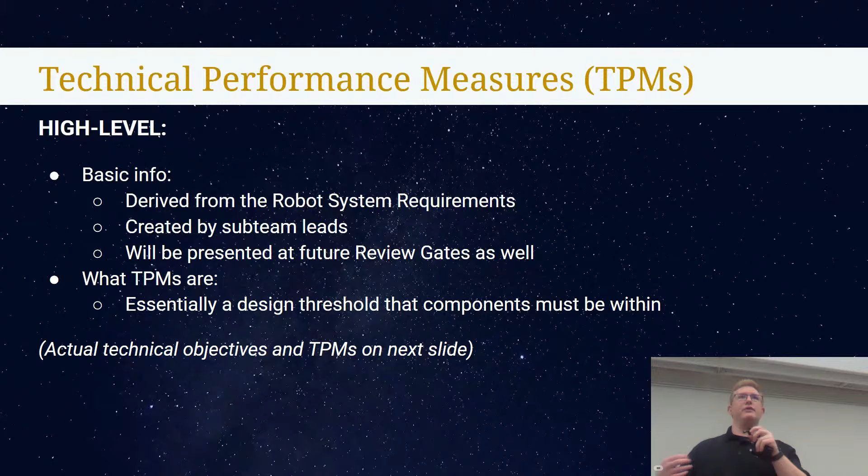I'm also going to be talking about our technical performance measures, or TPMs. Basically, TPMs are derived from our robot system requirements, and they're created by the sub-team leads. They will also be presented at all of our future review gates as well. In terms of what TPMs actually are, they're essentially a design threshold that components must be within.

These are some of our specified technical performance objectives, things that are outlined within the guidebook and then our stakeholder requirements. For example, the robot shall be contained within a payload envelope measuring 1.5 meters in length times 0.75 meters width and 0.75 meters height, and that is mandatory.

The robot shall also not exceed 1.5 meters in additional height, or 2.25 meters above the surface of the regolith, which is also mandatory. Then the robot shall not weigh more than 80 kilograms. This includes any beacons or external parts that we're using for navigation.

And additionally, a specific rule that we may be using this year is multiple robot systems are allowed. However, starting dimensions of the robot shall comply with the maximum volumetric dimensions and mass provided, as well as any other requirement that we have to follow for a normal robot.

Overall technical objectives that we're going for: the robot should minimize weight, minimize part count, have fasteners in easily accessible locations, and contain parts that are easily removable, disassemblable, or replaceable. The robot should contain components with low lead times, just trying to make the assembly as quick as possible. It should also minimize power consumption, incorporate dust-resistant features, be able to complete the mission autonomously, and use encrypted communications. These are all just competitive goals that we have.

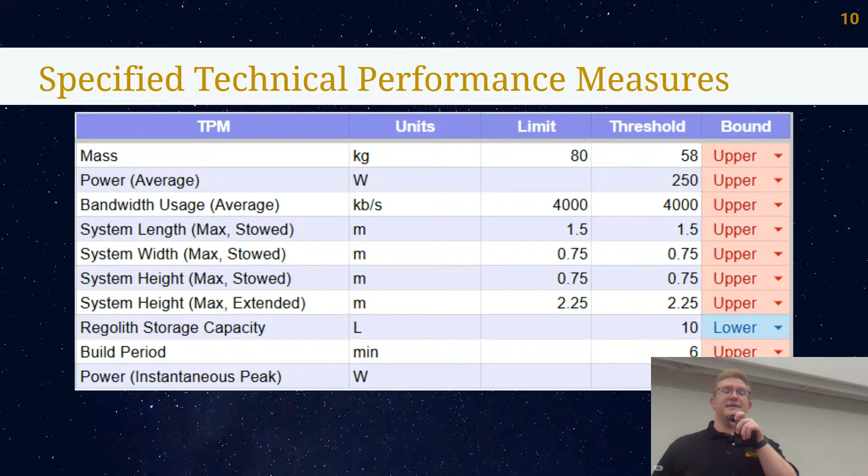In terms of our actual specified technical performance measures, our upper limit for mass is 80 kilograms, with our threshold being 58 kilograms right now. Our average power is going to be measured in watts with an upper threshold of 250. Our upper limit for bandwidth usage is 4,000.

The system length max stowed is going to be 1.5 meters as an upper bound. Width and height are both going to be 0.75 meters. System height max extended is going to be 2.25 meters.

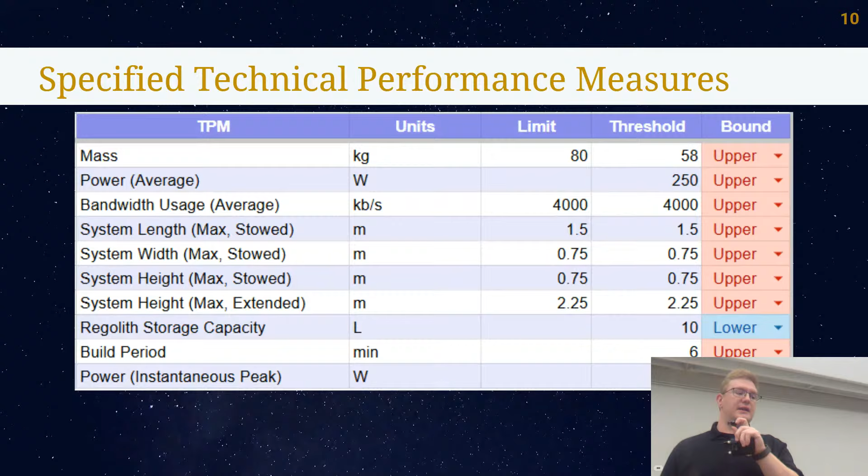Regolith storage capacity, our aim as a lower bound minimum should be 10 liters. Our build period should be around 6 minutes. And then our instantaneous peak for power should be about 750 watts.

And now I want to invite our FabOps lead to present the two robot proposal.

Excellent, thank you, Andrew. My name is Alex Repikov, and I am this year's FabOps lead. I'm here to present a proposal for two different robots. A lot of the sub-teams already know about this, and the relevant ones, I believe, will be talking more about it in their specific sections. But I'm here to give a general overview of what the idea is and why we might or might not want to do it.

General overview is that we have two robots. The first one will be the main robot, and this robot will go and mine regolith into its own deposition system, similar to ways we have done previously. We go and mine, we go and store it. What is different is that this robot will always be mining. It will never go and drive over to the deposition zone. It will just collect its regolith and hold on to it until the mini robot can come.

And the mini robot's only job is to go and shuttle regolith between the main robot and the deposition area, as fast and efficiently as possible. So to summarize, the main robot will always be mining, and the mini robot will always be moving, which means we'll be able to get more points because the main robot never has to stop mining to go and actually deposit.

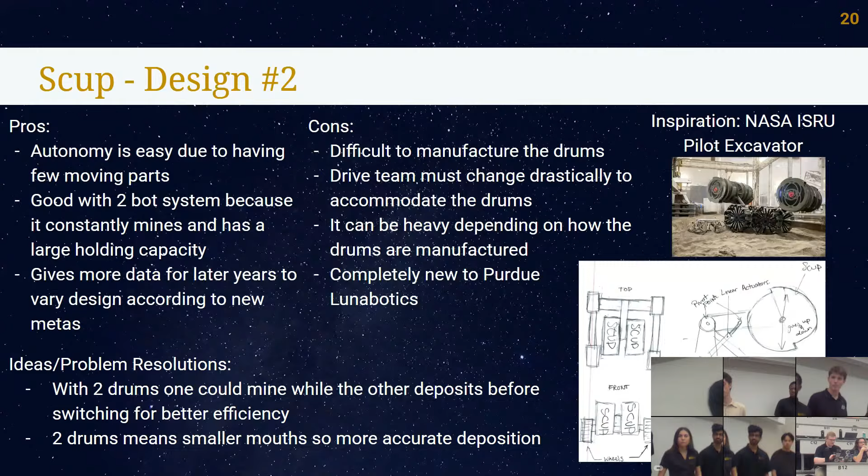Hello everyone, my name is Ashita. My group was in charge of coming up with the design for a bulldozer. In past years, our bulldozer idea has kind of been like a U-channel pushing dirt into the deposition zone. But as Alex explained, the layout of the competition field is not conducive to that this year. We have to travel a little bit more between excavation and deposition.

So our idea has transitioned from a bulldozer to more of an excavation scoop. We've noticed in past years that bulldozers aren't always the most efficient design because while they're able to scoop up the dirt, they don't always deposit it all the way. So our design has considered that weakness from past years, and Hayden will explain more about the excavation scoop design.

The way our design works is it uses two high-powered linear actuators to raise and tilt the bucket. The first linear actuator is attached from the base of the robot to the arm of the excavator, raising and lowering the bucket to give us the proper ground clearance to operate. The second linear actuator goes from the arm to the bucket, allowing the bucket to tilt to both scoop and deposit regolith.

The reason we chose this above a standard bulldozer design is because a bulldozer has to push horizontally into the regolith, which, with the poor traction of regolith, means most robots cannot get a significant amount of material in their scooper. We decided to scoop vertically into the ground, using the weight of our robot to get a tremendous amount of regolith, then safely carry that to the deposition zone without loss of material. And now Ella will further elaborate on the benefits of our design.

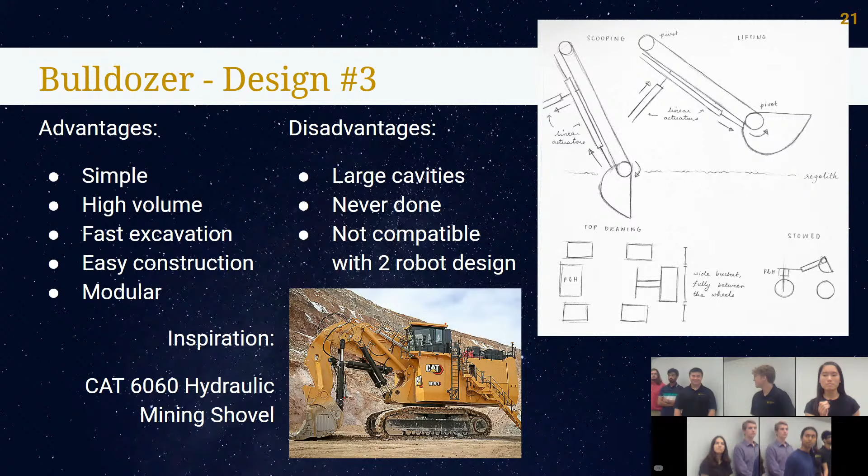Hello, my name is Peter. Our 4th design is the dumpster, made by University of Illinois Chicago in last year's competition.

Hi, my name is Anurag, and the way this system would work is by taking a bucket and essentially shoving it into the ground and driving forward to get as much regolith as possible into that bucket, then driving to the deposition zone, where it would vibrate to shake out the regolith and increase the volume by simply fluffing it up.

Hi, I'm Austin. The advantages of the system are that it would mine very quickly because it can hold so much volume. We saw this last year in terms of how much volume it was able to move. And because of the design, it also removes a lot of heavy components, so the mass will decrease.

Unfortunately, this design has many disadvantages as well, which we decided outweigh many of these advantages. Firstly, we believe it has very low compatibility with the 2-robot system because it has to stop mining and transfer the regolith into the second robot. We also have no experience with this design, never attempted something like this, and we have very little examples to look at from the past. We also believe it would struggle to be fully autonomous because of the complexity in completing one cycle of mining operation, and there's a high risk of getting stuck because it digs pretty deep holes.

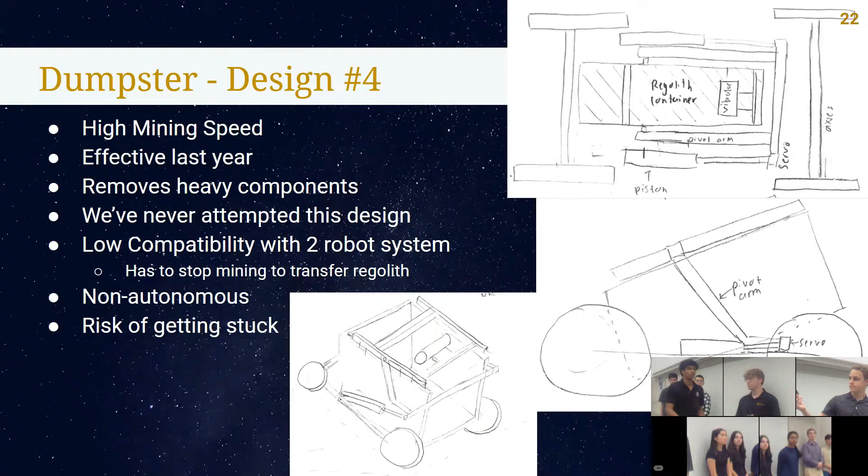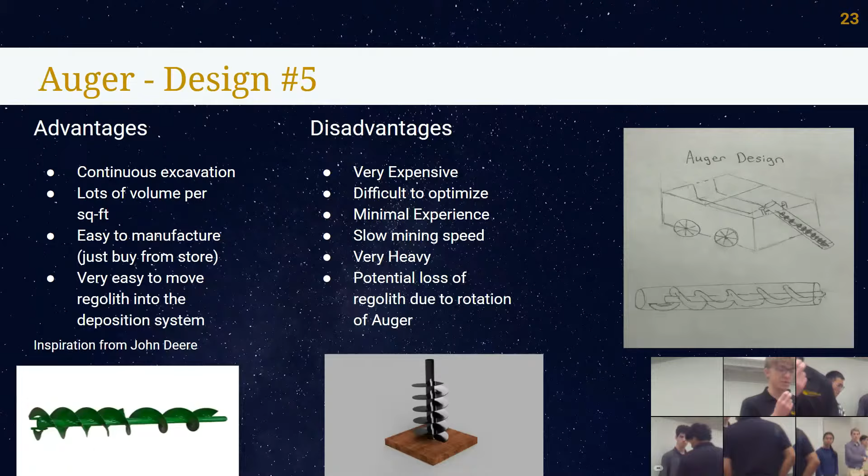Why is SCUP's mining speed rated so lowly given the performance of UVA at competition last year? SCUP has a low rated mining speed, more in comparison to a bulldozer and dumpster who still mine significantly more at competition.

I believe that SCUP, when optimized, has similar mining speed to a bucket elevator optimized. However, I do believe in a field situation like last year, those two designs would still fall short in pure volume compared to a bulldozer and dumpster, and that's where I weighted the mining speed.

I do agree that SCUP is worse than a bulldozer and a dumpster, but bucket elevator could outperform SCUP by a significant amount, despite two pretty good bucket elevator teams, Alabama and Michigan Tech, mining significantly less material than UVA's SCUP last year. So I'm wondering where the justification is for bucket elevator's somewhat high mining speed, comparable to dumpster, who mined almost 100,000 cubic centimeters more than both of those bucket elevators in the first round of KSC.

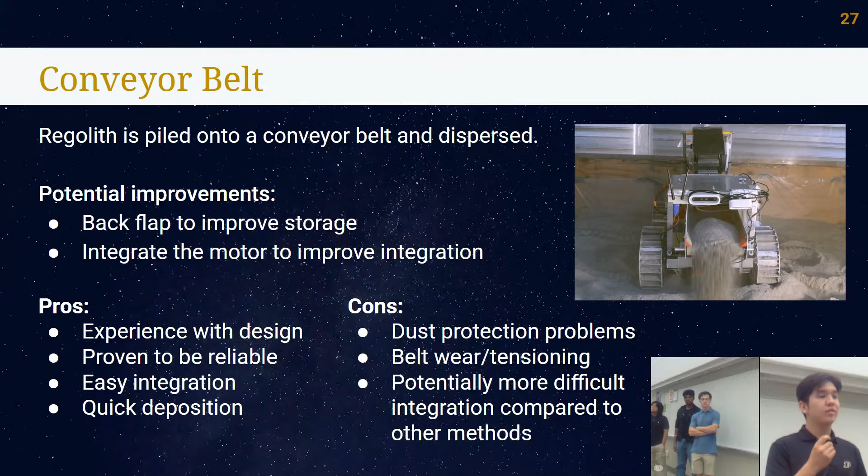Our first design idea is the conveyor belt, the design we ran with last year. Regolith would be stored on top of the belt, and when the belt is activated, it would disperse the regolith out the back. If we were to choose this design again, potential improvements could include a back flap to improve storage and integrating the motor within the belt to improve integration.

Some pros with this design include the experience—we've made this belt before, so we could focus more time on the improvements I mentioned previously. It's proven to be reliable; we've taken it to competition and it's performed relatively well. It's easy to integrate with other systems, and compared to other methods, it's pretty quick when it comes to deposition of the regolith.

When it comes to the cons, there are a lot of moving parts, so protecting all of them from the dust created by the regolith would be a challenge. Additionally, if the regolith were to damage the belt in any way, it could affect the speed of deposition and reliability. And finally, if we were to choose the conveyor belt for the small robot, it would have a much harder time integrating other systems around it as opposed to something like a dump truck.

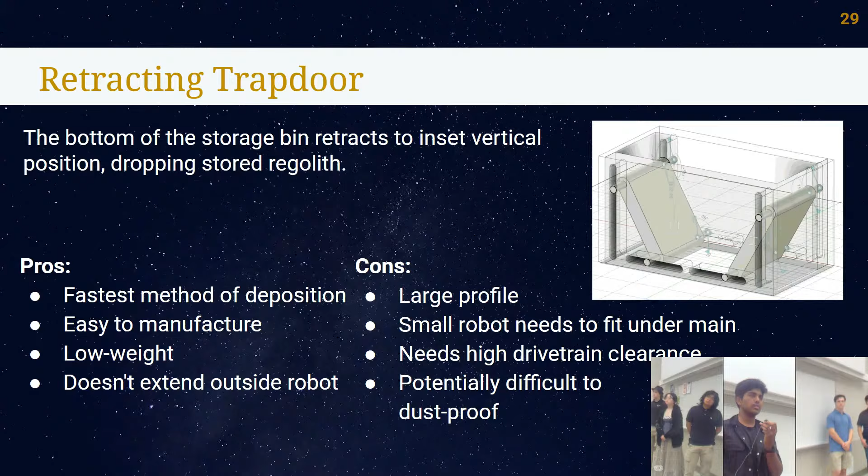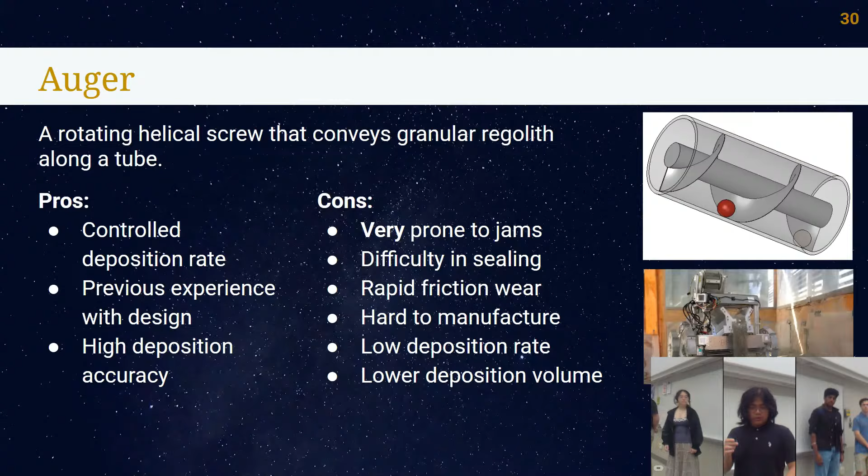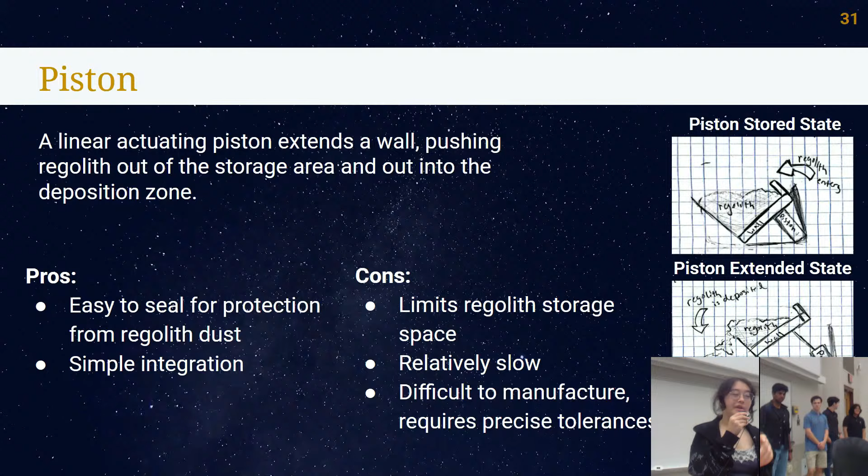Hi, I'm Aya, and I'll be covering the piston design. Basically, there's a small linear actuating piston that extends a wall, pushing up the stored regolith to the edge of the container, which pushes it and makes it fall out into the deposition zone. This makes it pretty easy to seal for protection from regolith dust. And since all the operations are basically in the same housing area, the integration is pretty simple and doesn't interact much with the other systems, but it does have a lot of cons.

The geometry makes the storage space pretty limited, so it's not very viable for a mini bot, as it doesn't have much volume, and it's pretty slow because the speed of the piston is also pretty limited. It's also pretty difficult to manufacture because the tolerances needed for all the parts are very specific, and this reduces the reliability of the system quite a lot.

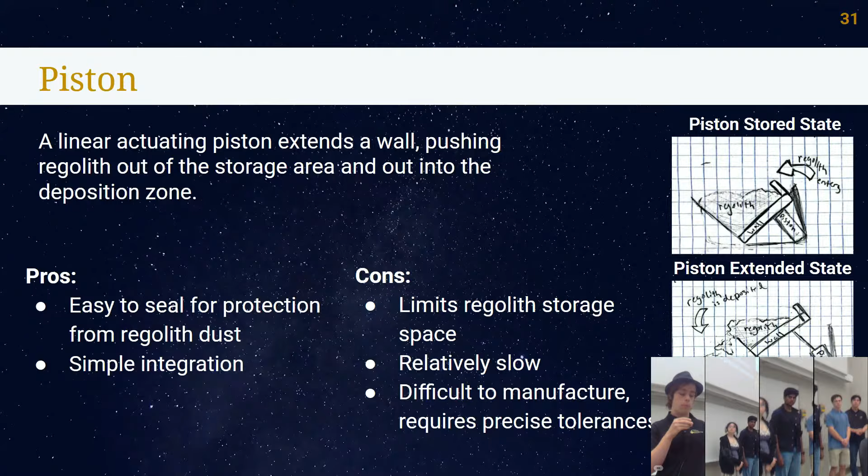But it's a little bit more difficult to manufacture, mostly due to some concerns we ran into last year actually stitching the belt together. The trapdoor is faster in terms of deposition speed, as it's all one single motion regardless of the amount of regolith, and probably a pretty quick motion. However, it's also harder to integrate in terms of making sure there's nothing else beneath it, and also all the dust concerns previously mentioned by Akshay.

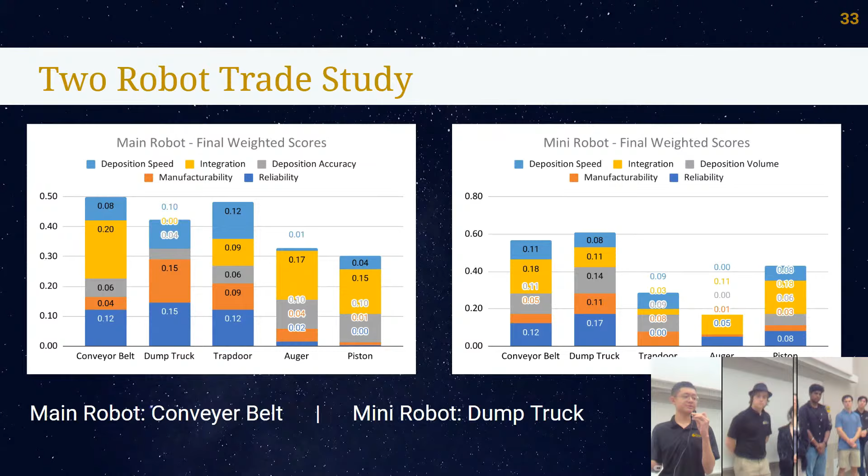For the two robots, the thing that came out the most in terms of our criteria, comparable to the last trade study, is really the integration between both systems and on their robots individually. For the main robot, the conveyor belt stood out the most because it's better in terms of integration, whereas the dump truck might hit the excavation system, and trapdoor or auger piston just don't perform as well in terms of integration. For the mini robot, it was more of a jack of all trades, and the dump truck came out on top. That's what we got. Any questions?

Alex: On your main slide, you mentioned an estimated volume of 20 liters. Yes, that's the same as the SDR value from last year. Are you considering making the system the same size, or expanding it? Last year, the actual volume in liters wasn't actually 20 liters.

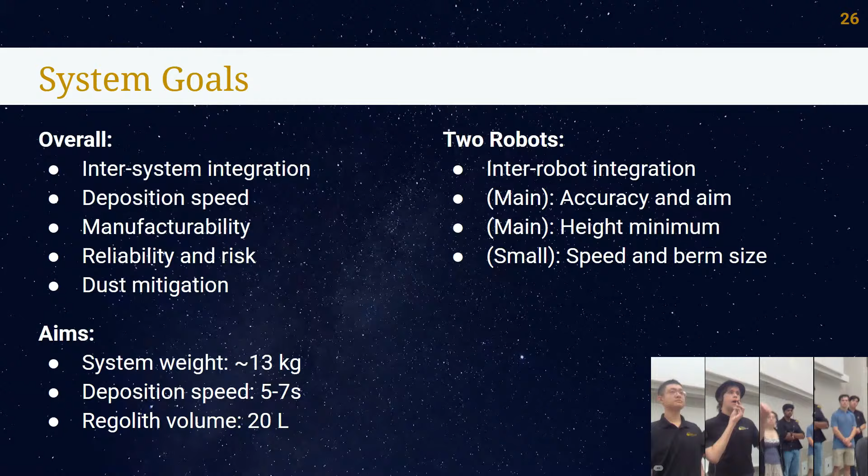So that's still a higher estimate. I do hope we make more than 20 liters though. I would also say that based on last year's design, it's very possible that with an equivalently sized system, we could hold more regolith. There was a lot of losses in that system due to not having a flap on the back, meaning we couldn't pile up regolith against there, and also not having a flap on the front due to having to make cutouts for clearance with the excavation system. So by improving both of those, and by putting walls on either side of the conveyor belt, I think we could drastically increase the amount of regolith held in the same volume.

So to clarify, 20 liters is more of a lower bound than an upper bound? So you're estimating you might hold maybe 30 liters if everything works out right, but 20 is kind of the baseline? I think it's possible. I think 20 might be more of the goal than the minimum.

John: So looking at the model for a single bot and two bot, the difference between a 20-liter system and a 50-liter system, which is what the drivetrain could carry with a 130 kilogram weight limit, is 350 points and about 600. So increasing the volume for the single bot seems super important. The two bot system though is kind of handicapped by excavation rate, and with our previous year's excavation rate, that ideal volume would be about 30 liters.

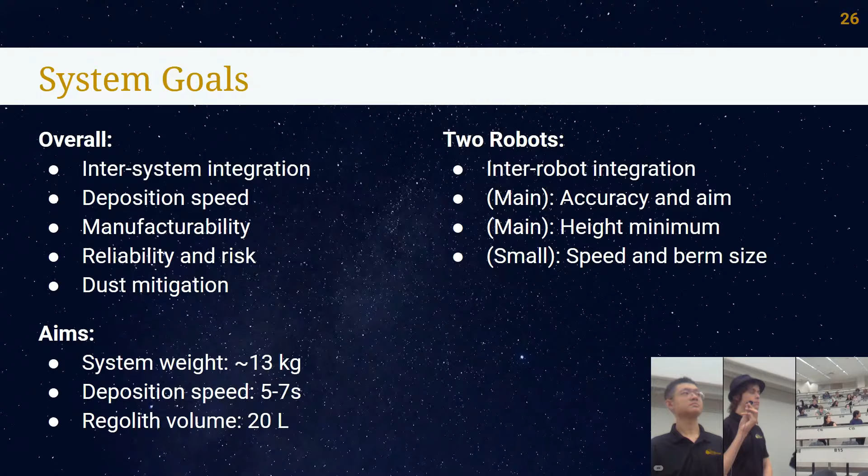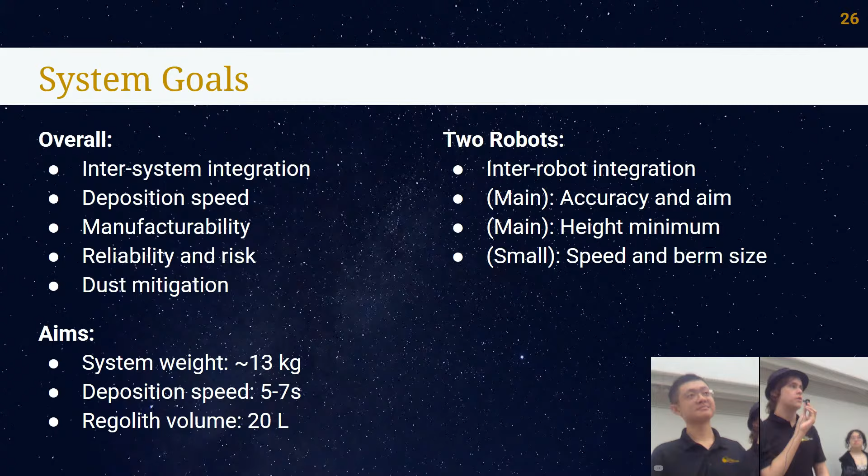I have two questions. You pose tipping concerns for the dump truck, and given that you put the dump truck on the smaller robot, how would you handle that? Because regolith sticks a lot - would you attach some sort of motor to vibrate the system, or would it just be such a steep angle? Like what Tommy proposed, having a vibration motor like in your phone, to try to shake it off - I think that could be a pretty effective way to do it. As for tipping, I think there are ways to mitigate that, maybe adding a supporting rod when the door opens up to prevent any tipping if that occurs.

Yeah, if we're going down the dump truck route, we might be able to look into materials that would stick less, or try to get a very smooth finish. But I think the motor and such are ways to try to mitigate the amount of dust that's sticking.

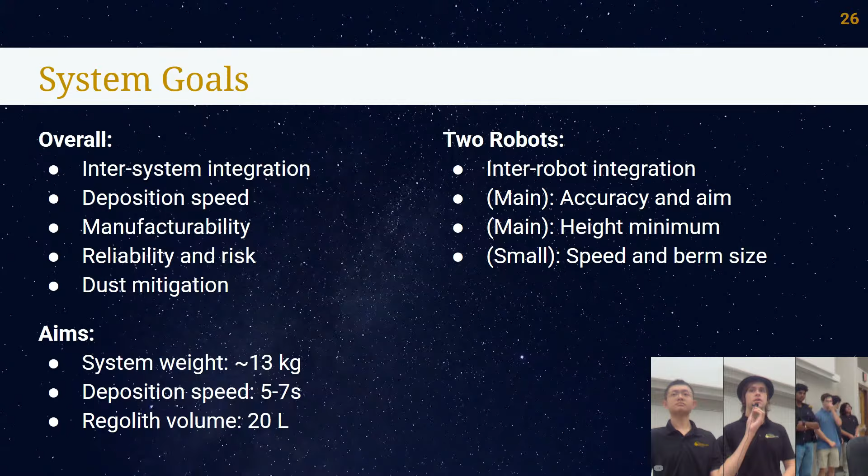Can I see your trade studies again? And then I also have a question - for one robot or two robots? I could just look at both of these. Two robot. So you guys didn't consider mass - do you think the conveyor belt would be lighter than a dump truck on a smaller robot?

It's hard to say right now. I think they'd probably be fairly comparable, or conveyor belt would be heavier. I think it would depend on what kind of materials we can find for the construction of the dump truck bed itself. And have you guys played with the idea of the mini robot actually being our excavation robot, and then we just have an extremely large deposition robot, almost like a very low to the ground conveyor belt? Would that make more sense?

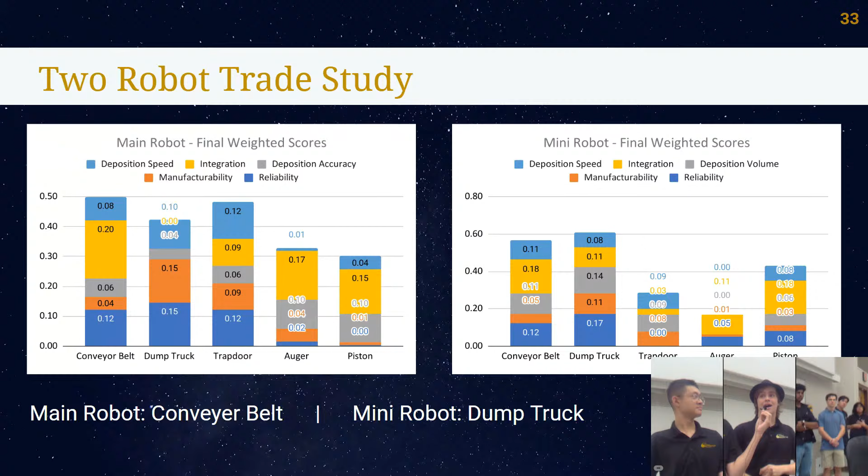Maybe more overall. The two robot idea in general has a number of inter-team discussions to consider. The question continues to become: well, then where does all the regolith go? Is the excavation robot just idling there while the deposition robot goes and dumps? And in that case, what's even the point of having two robots when you could just have one really big robot? So I would say my analysis still states that the deposition systems on both would have to be relatively equal.

Do you think intuitively the conveyor belt would be lighter than the dump truck on a small robot? Intuitively, I honestly feel like it's hard for me to say. I could see it going either way.

Alex? So on your dump truck slide, one of the cons you mentioned was that you needed a big and powerful motor. Have you considered using something like a linear actuator instead, so you wouldn't have to deal with the pivot points? Certainly. Cool.

Let's go with Ankur, I think. Have you considered using the conveyor belt, angling it upwards, but at the end of it, so that you could increase the volume, having the starting point close to excavation and pull further down into the drivetrain system? So you're saying excavation is like this, and then the conveyor belt is like this? Yes, certainly that's a consideration, and something we'd definitely be interested in doing, which would probably be improved by moving the deposition motor into the belt.

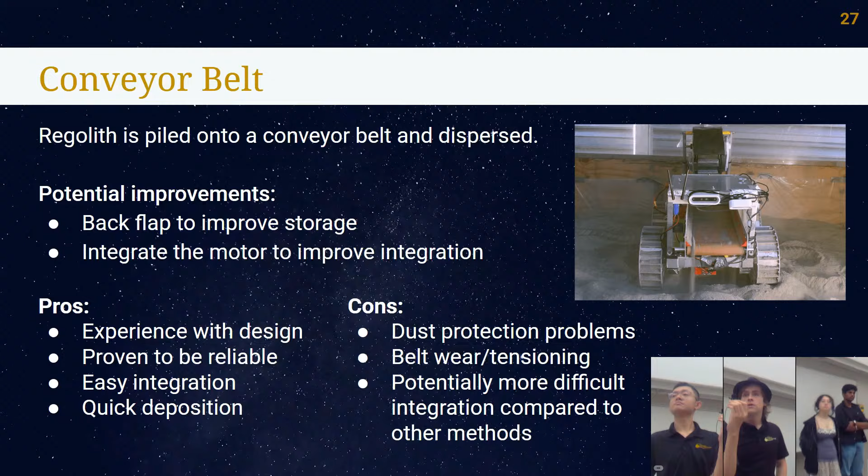When you guys were considering the dump truck, or dumpster idea, did you consider the dump trucks that have a removable bucket? Kind of like how when moving out of a house, they'll leave the bucket of the dump truck in the driveway, and you can continue to load it up until the dump truck's ready to pick it back up. Similar to how we're continuously loading up the dump truck as it's awaiting other things, and then we just have multiple buckets that we continuously fill and take over and over again.

That's definitely very interesting, and potentially a route to take in terms of integration for sure. It'd be interesting to see the cycle time, because it sounds like creating that into a full two-robot system would require some exchange time: the small robot coming back with its dumpster, parking that, then grabbing the big one, putting that down, then grabbing the small one and loading that into excavation. But that's certainly a route we could look down, and that might be very interesting.

Will? Looking at excavation and deposition integration, since you all are going with a conveyor belt similar to last year, I know you mentioned the back flap, which we had to excise. Do you see any other additional ways we can improve the integration? I know Ethan and I will be discussing this a lot during the design portion. But if you're going with a bucket elevator, making it at a steeper, more slanted angle to the ground, a less vertical angle, would improve that significantly, because then there's more overhang. The problem was that it was very vertical, which meant the buckets had to come back down this way.

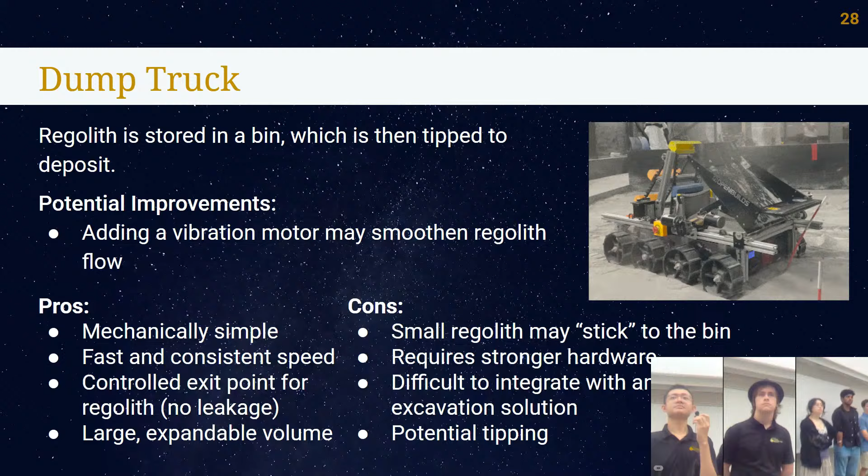Alex? A little bit ago you mentioned with the deposition and excavation sizing that if there's a two-robot system, deposition needs to be big enough that excavation has somewhere to mine, so you don't just mine on your own and they don't have to sit around waiting for the mini robot to come back. Are you concerned that will happen with your current system volume, or do you think, especially with the increased excavation speed, that the current volume counts?

If the volume stays unchanged from last year, then definitely. I believe a standard trenching run would essentially fill up last year's deposition system to a pretty high amount of capacity, and that was about 30 seconds, I believe. So my understanding is that that would be a concern. That's why there are ways we can increase the storage capacity of the current deposition system. There's an extent to which the system needs to expand in some ways, and there are things we can do to facilitate that. I think it would need to be, but what is the minimum volume we need? I think that would be a longer discussion later.

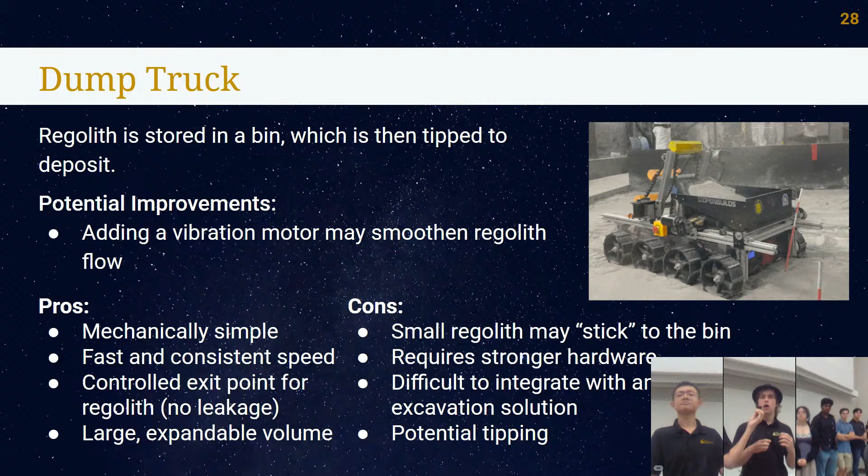Will? I know that for excavation, looking at the bucket elevator design, we are heavily considering wider buckets. Do you all see there being a possibility of making the deposition system wider? Yes. The main thing that facilitates that is moving the motor interior to the belt. Once we do that, we no longer have to contend with getting power through the center of the drivetrain, so then we can expand it out to the sides. That might be concerning in terms of electrical box placement, but that's another concern.

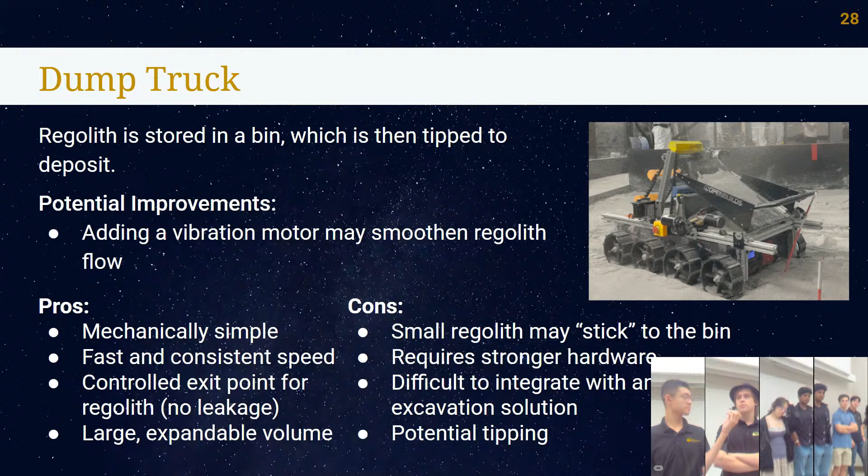Last year you mentioned that the manufacturing for the conveyor belt was hard. Would you guys look into a continuous rubber piece, or was it the spline that you had? The belt last year ended up working out quite well, but certainly a continuous piece would be better in terms of consistency and usability. I do think we'd be better at making a belt this year. I forget if we have any material left over, but certainly looking into a continuous belt, it was challenging to find suitable belts, but potentially with a larger system that might be easier for us to find.

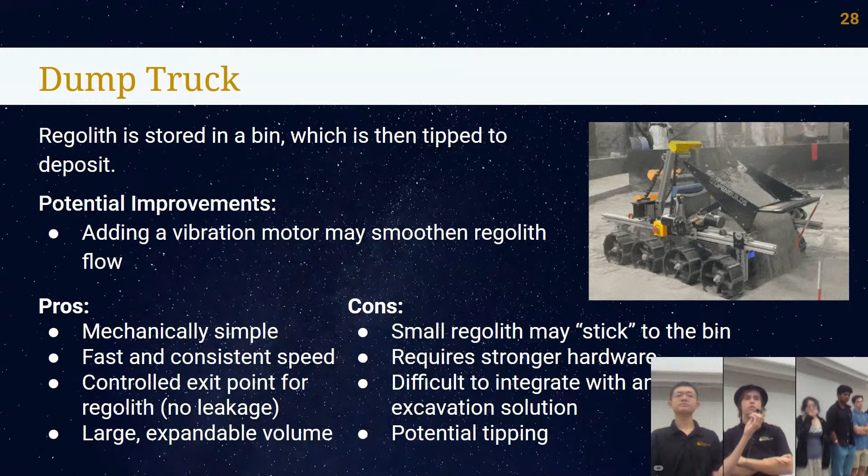Any other questions? I'll hand it over to drivetrain then. Yep.

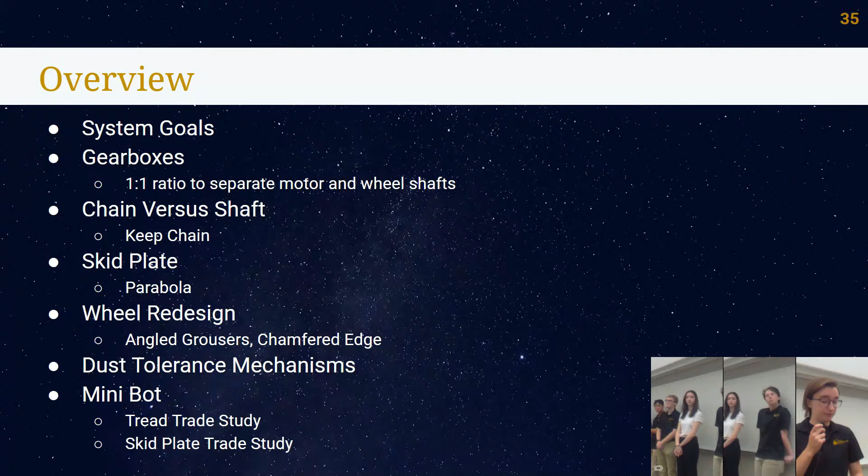As for our gearboxes, our current plan is to stick with two 200-watt motors with 50-to-1 attached gearboxes, and for traversing around 18% motor power to give us about half a foot per second. With these motors, it's 32 newton meters of rated torque, 92 newton meters of peak torque from what we've seen, and for rated speed, about 60 RPM with 80 RPM peak. Our plan is to stick to one-to-one gearbox gearing to separate our motors and wheel shafts just for ease of space. As for the gearbox itself, we plan to stick with a box tube design, with the major point being 3D printing most of the pieces to design test for assembly, which was a major problem we ran into in previous years.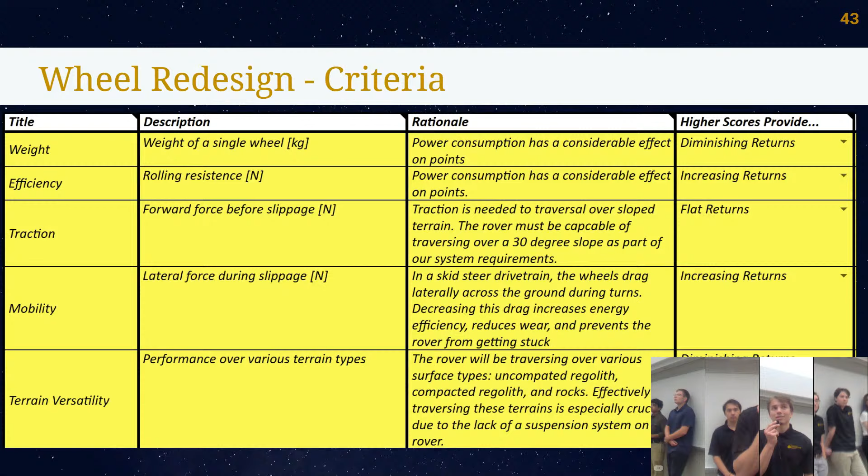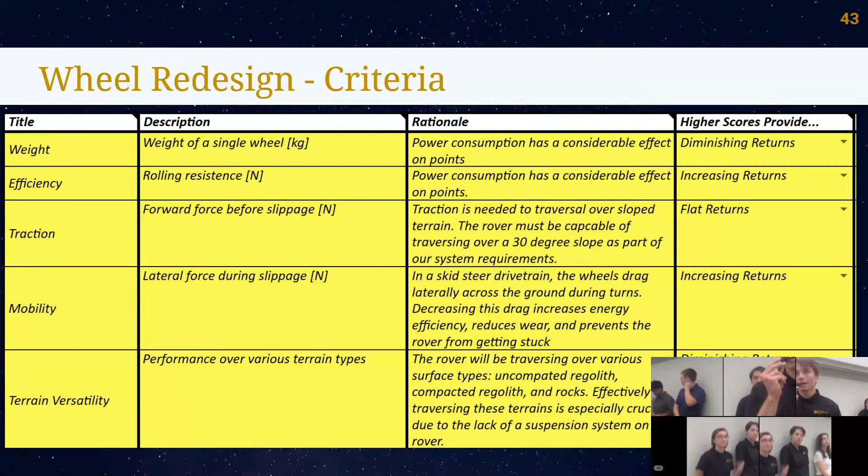Finally, we have terrain versatility. This is especially important because we lack a suspension system, so being able to go over various terrains like big giant holes in the ground and rocks is super important, so we don't get stuck like last week.

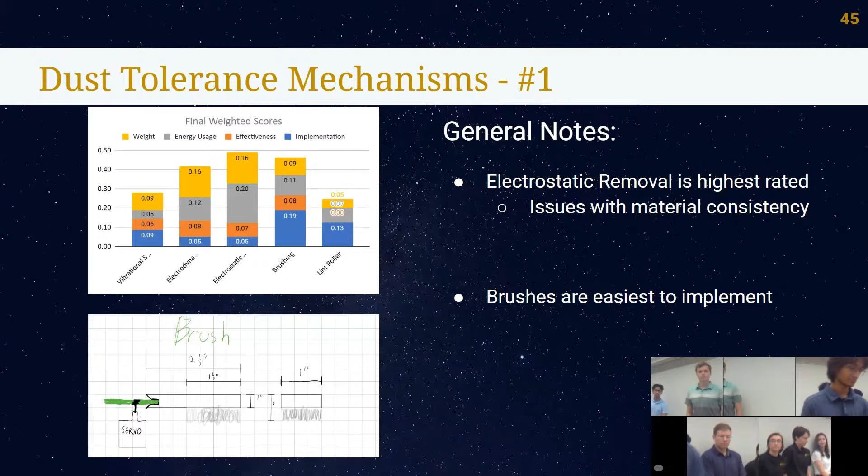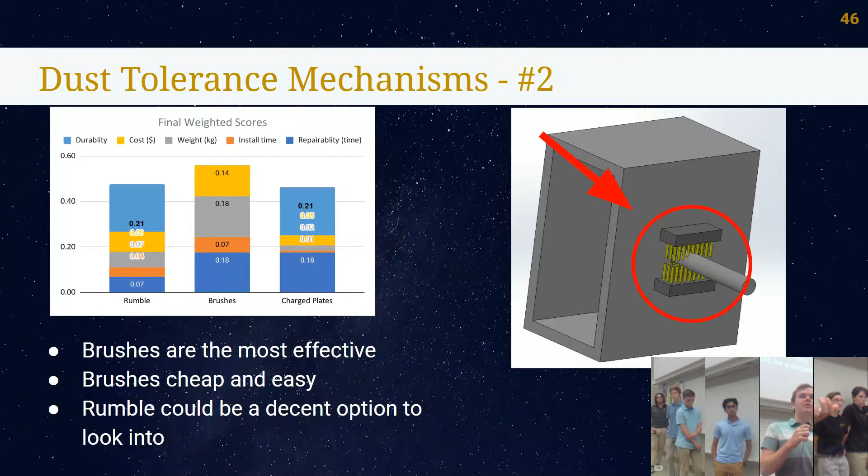Hello, my name is Jonathan. We also saw brushes would be really fast to implement. So we were thinking, what if we added some other source of dust tolerance? We were thinking maybe adding rumble if we had more time and more capabilities, because that would allow us to have 2 different systems—so if one falls apart in one situation, or dust still sneaks through, we'd have another system able to remove more dust.

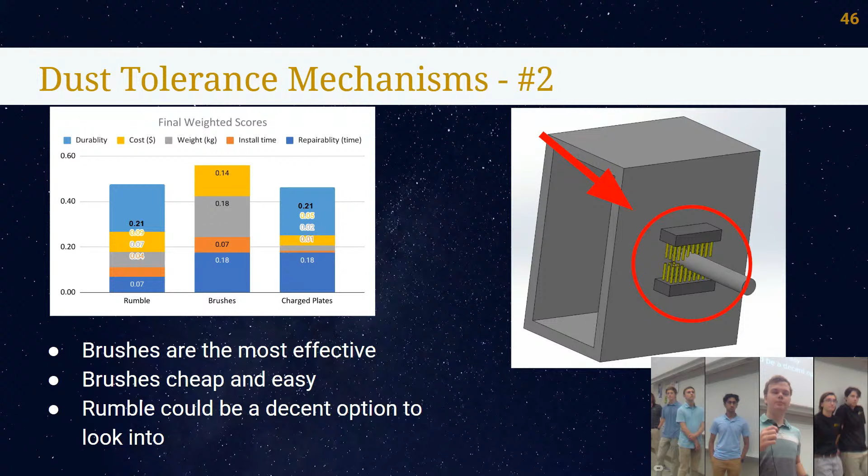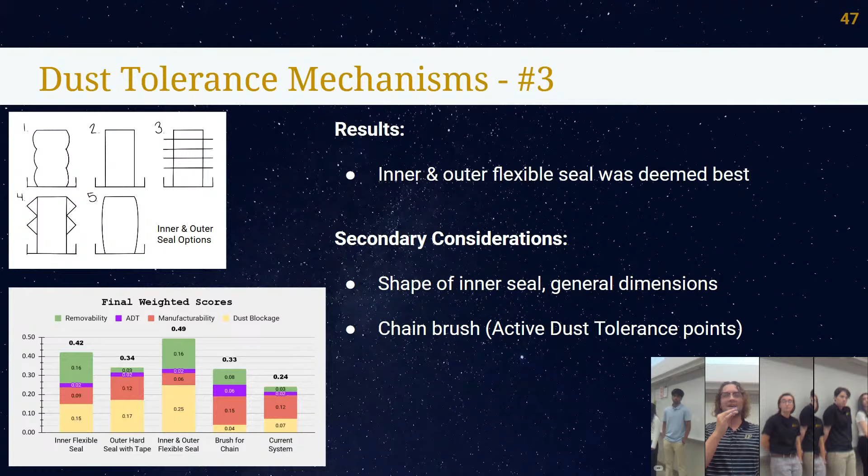We chose to go with the brush because we thought it would be the most effective and efficient design overall. It would be easy to implement, wouldn't take up too many resources, and we think it would work well too.

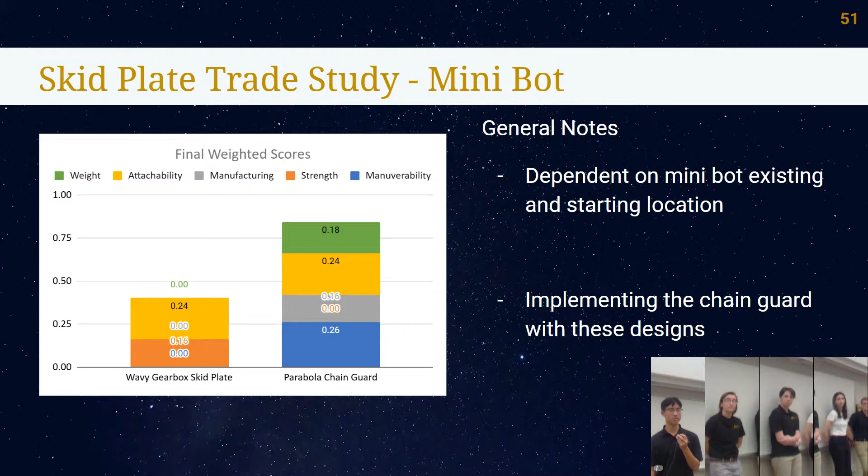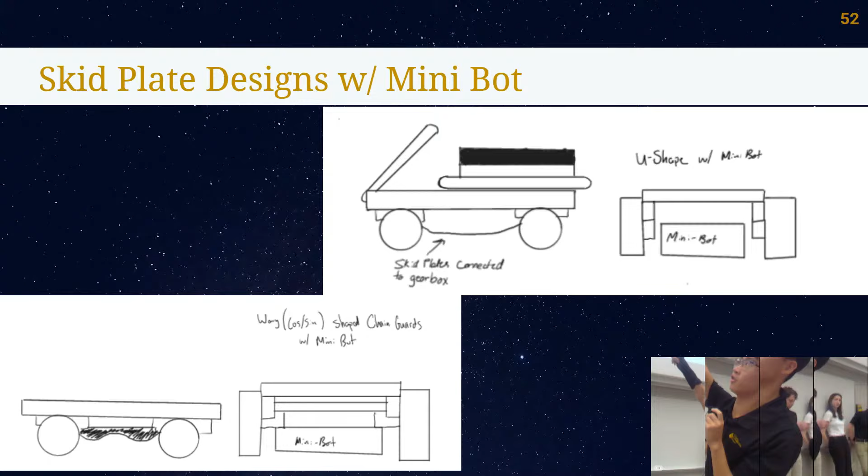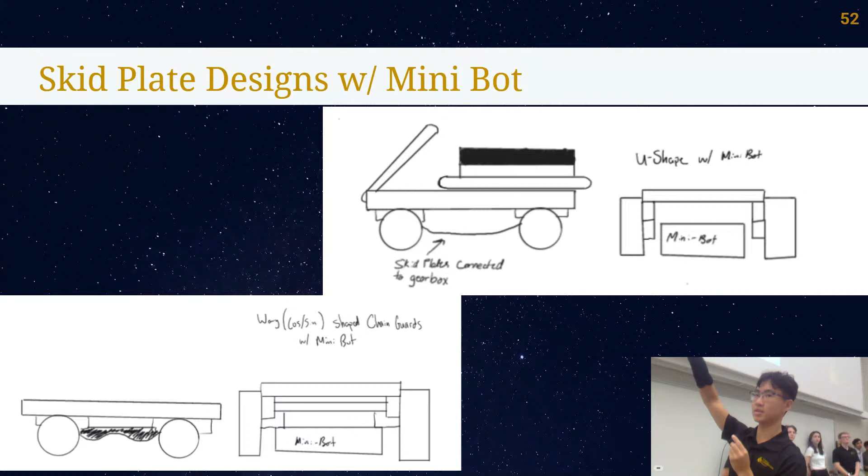So here's some images. If the Minibot were to go under—on the frame on the outside, there's like a little box under that. That would be the chain guards and skid plates, and it would still help if we got beached on a rock or some obstacle. It would still help tilt one side to give traction to the wheels so we can get out, whether slow or fast, but we'd still get out and continue our run.

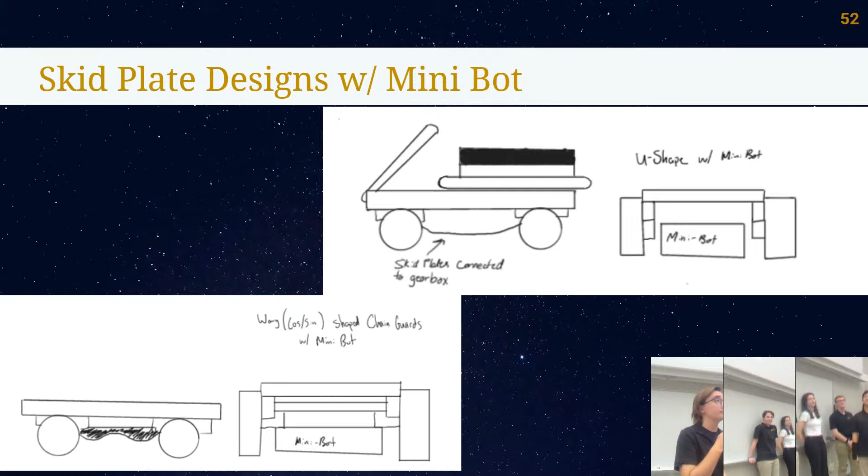Oh, my bad, sorry. Any questions? It's a lot of hands, I'm sure. Go back to the slide on the spring steel wheel, please.

My main concern with that is, at least the way I conceptualize it, you might not get the same compliant behavior at our size. All the literature out there on spring steel mesh wheels is for far larger rovers, like the lunar roving vehicle, which was used to transport people during the Apollo era. So humans, and our rover is obviously way smaller, so we weigh far less. Our mesh, the way I see it, would be too stiff relative to that, and I don't see a way to compensate without losing structural integrity, like making the wires thinner. That would depend heavily on the material used, which would need more experimentation, but that's a good point.

Can I ask you? Yeah. So John, I know this is your baby—you were using the word spring, so are these leaflets of steel that are almost meshed together, or are they springs?

Yeah, so the current idea is you'd buy some very thin spring steel sheet, like 32nd inch, from somewhere like McMaster-Carr—it's formable. You'd cut them and then bend them on an arbor press, for example. We don't have the specifics labeled out, but we did a little preliminary analysis, and it seems we have access to a furnace here at Purdue, or a few. I haven't figured out the size of that furnace yet—I should send a message and ask.

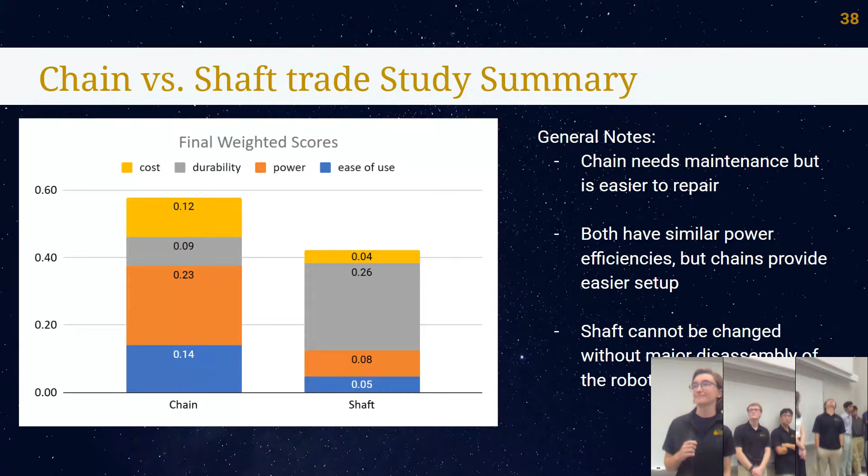Okay, can I talk about the wheels now? Alex, think about the skid plate. So about the skid plate, how do you evaluate skid plate effectiveness? What is your metric for testing, if you will say, hey, we determined that flat is good enough, or that we need one bend, or infinite bend, this thing. How do you determine which one is best?

Yeah, so that'll mainly be if it can get off the rocks effectively, which is measured mainly by time, and then how much weight it adds versus a flat one. So if it ends up being kind of flat with one bend in the middle, that's very similar to a flat skid plate. But we will definitely be doing a type of skid plate, it's just the shape of it, and then we'll be looking at how well it can get off of rocks or out of ditches, which we kind of forgot about, I'll be honest, because we didn't get stuck in a ditch last year.

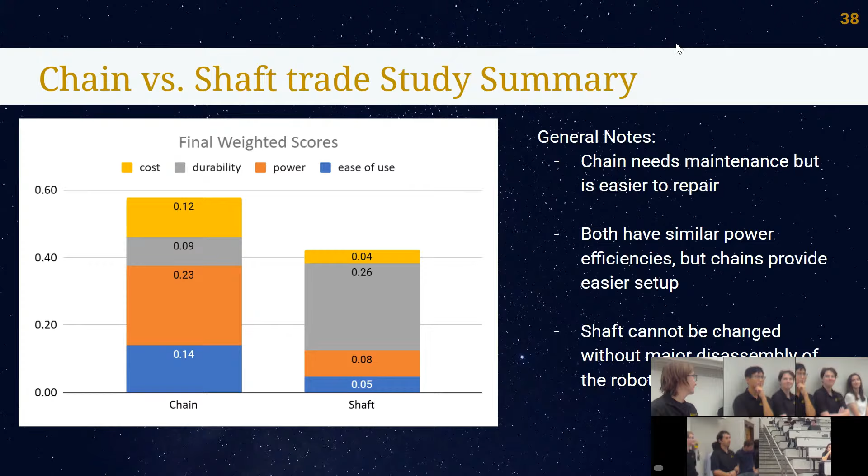And skid plate, it's kind of in a similar vein, where how is this curvature a benefit over a flat plate that just prevents the pinch points? Because what I see with the curvature is that you're introducing more pinch points and decreasing your ground clearance and making it easier to get beached on rocks.

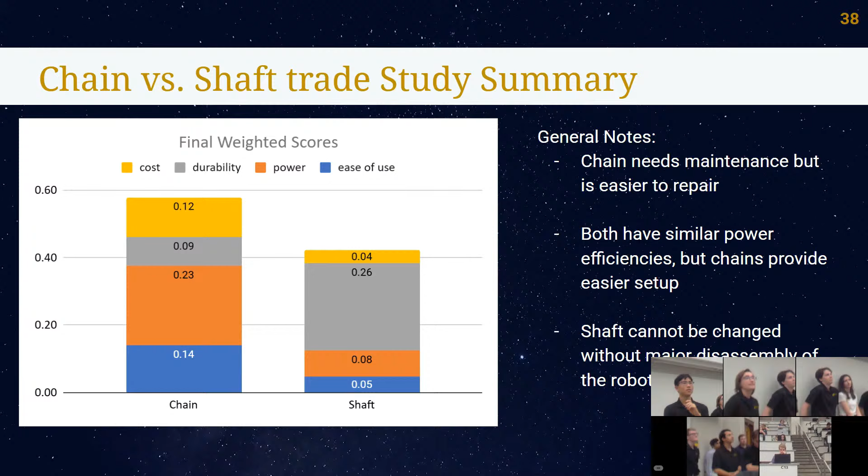So is that risk of being easier to get beached better than having that more ground clearance, which makes it less likely to get beached and has less pinch points where it can get jammed? I just don't see why having such a complex skid plate design is beneficial. Well, if we go with any design that just comes out flat from the bottom, if we run into a rock or some obstacle, I assume the robot would stop, or run into it and the rock wouldn't go all the way underneath the robot.

And at that point, if we had a flat skid plate, the rock would be under it, and there's a possibility it could be tilted up or fully sitting on that rock, and we can't do anything about it. But if we had some curvature under the robot, at least we could run into it, and maybe the robot realizes it can't go that way and backs up and goes another way. Instead, if it doesn't and just keeps going on the rock, it'll create momentum to tilt the robot back down onto its wheels and keep going.

I don't see where you're getting this extra momentum from, other than you have to be stopped and you're relying on the fact that gravity is able to rotate you, which, if you're beached, you're already kind of out of that option.

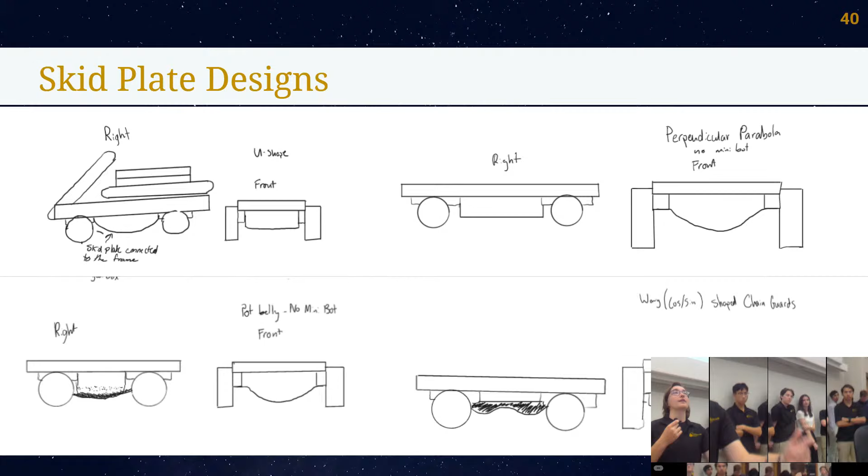I mean, this is something you guys can play with once the robot's manufactured as well. Yeah, it's not super complex in terms of changing your design, as long as the connection points are the same, it wouldn't be hard to interchange. I think the thinking with the curvature is the momentum comes from being able to shift things in the robot, such as if the bucket elevator is being lifted or lowered, that shifts your weight and can give more momentum. Whereas if it's flat, it gives a little bit, but if it's curved, it can kind of get the ball rolling.

I don't think that changes the momentum in such a way that will allow you to tilt left or right, which is the direction you will generally need to get unhinged in this case. That just moves your center of mass forward and backward reasonably, which could give the wheels more traction. It's something you can test. It can be tested later.

And for PDR, we'll have a better idea of what the design will look like as well, like how low the curvature is, the slope, everything like that. Having something that isn't just a flat plate will definitely need a lot of testing, probably with pure 3D printed models and smaller versions of the robot.

I would say you need to do a lot of looking into that, because my gut feel is that having a curved plate is significantly different. Maybe what Peter proposed with flat plates might have some benefit, but in general I think it would just be better to not have material there so you don't get beached on the rock in the first place. I think the skid plate is what's causing it to get beached on the rock.

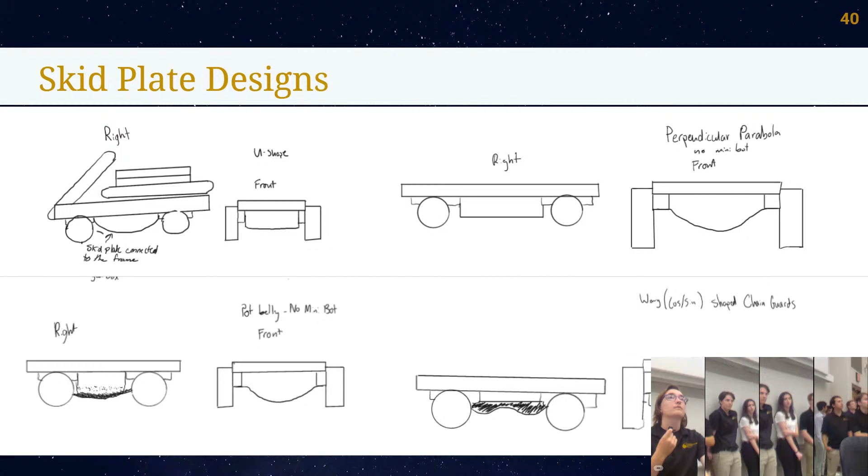Getting beached means that you are... or in a hole, yeah. If you are using the skid plate for its intended purpose, you are by definition beached here, right? Just because it means that you have wheels off the ground. So I'm concerned that this will be an avenue where you learn, oh, it's better to just not have material there to get beached on.

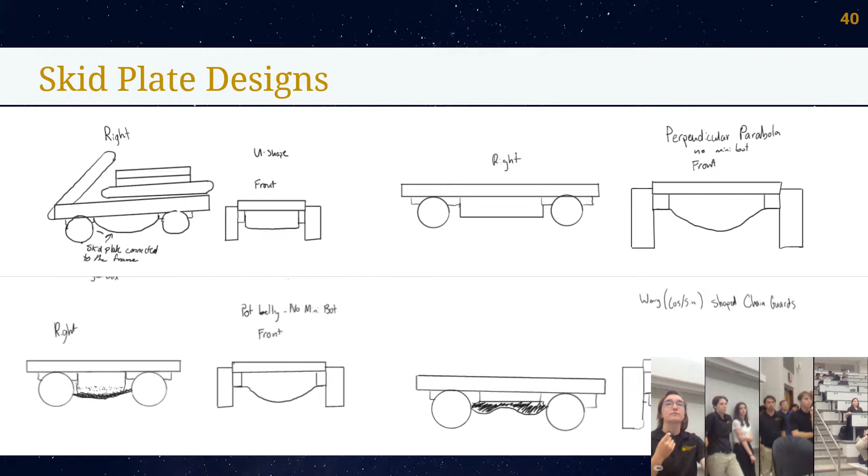But it's definitely something you should look into. You guys can test on there. Yeah, we can test that. All right, okay.

Now I have a question for the wheels. Looking at the wheels, my first question, talking about the efficiency term in the trade—are there any sort of calculations involved in trying to evaluate these designs, or is that more sort of a gut feel?

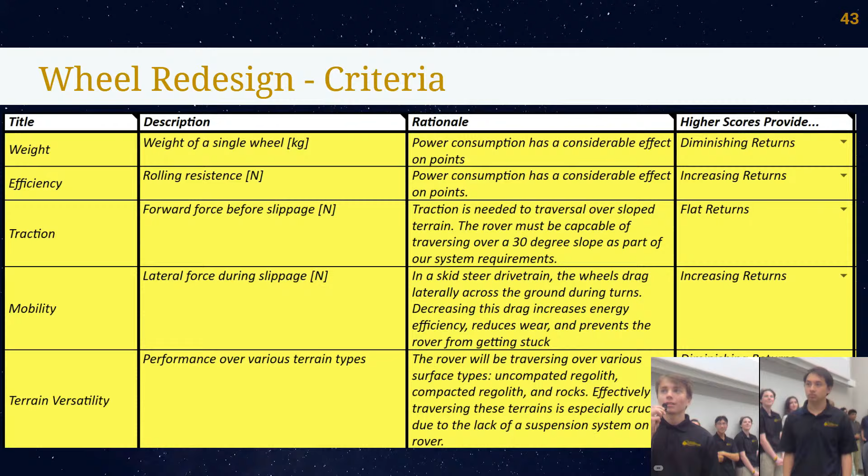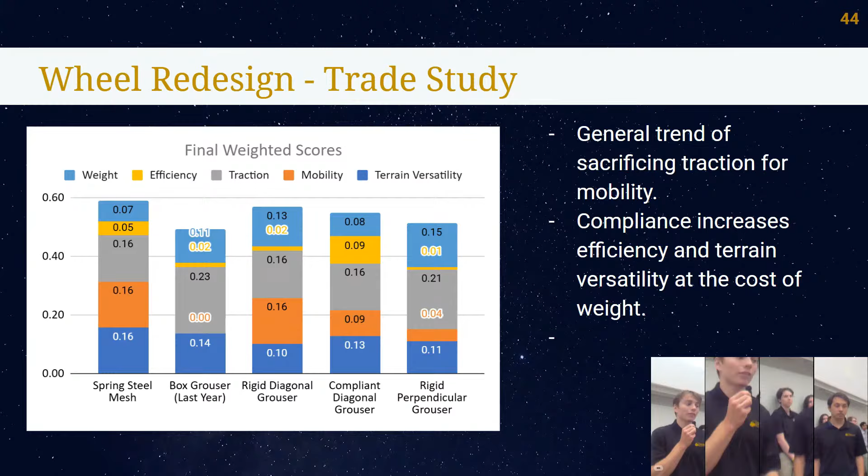Okay, so efficiency, like we're measuring this as rolling resistance, so this is just pure going straight forward. If you've seen our trade study here, the reason the compliant wheels have higher efficiency than the non-compliant ones is because the idea is that in a situation where you have a soft surface, the majority of your rolling resistance comes from how much your wheels sink into the ground. It's completely unlike a rigid surface, where you want your wheel to be as rigid as possible and the surface to be as rigid as possible to minimize rolling resistance. That's why trains exist, for example. In soft terrain, it's almost the opposite.

Almost, not quite—there's such a thing as too much compliance. From the very little research I've done so far, and by the way this is mostly intuition, I want to be clear, it seems like in order to decrease rolling resistance, the name of the game is to reduce how much your wheels sink. If your wheels can distribute their load over a greater area, you decrease pressure, decrease sinkage, and increase efficiency. Okay, I follow you on that.

My second question is just sort of in general, talking about different wheel designs—are there any tools or processes that you think would be crucial for us to acquire the ability to do? Like, for example, if you're trying to do the compliant diagonal grousers, I'd think a rim roller might be incredibly important for making that out of rim, right? Or is there anything like that?

So just in general, tooling for all the compliance stuff—my understanding of how you get that compliance so far is you have some kind of stiff, high strength material, and that looks like spring steel or composite parts generally. Composites are super scary, so I don't think that's something we should consider pursuing right now, unless somebody has something else to say about that. But spring steel, the manufacturing for that looks like a furnace and a press.

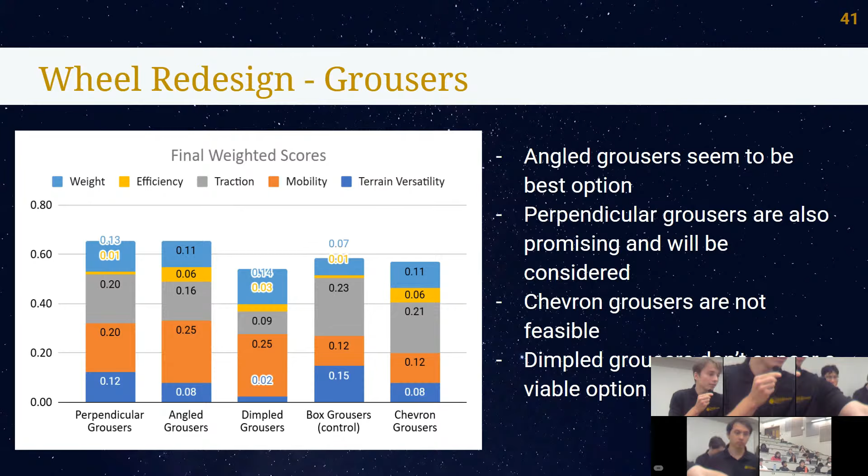I seem to see that a number of teams seem to be able to turn better than us. Oh yeah, so to be clear, our wheel last year, this box grouser, if you go back you can see the mobility, these are grouser designs. Our mobility is like 0 basically for box grousers. It's actually the worst possible, you can't imagine a worse one. It's just like a big fat face turning.

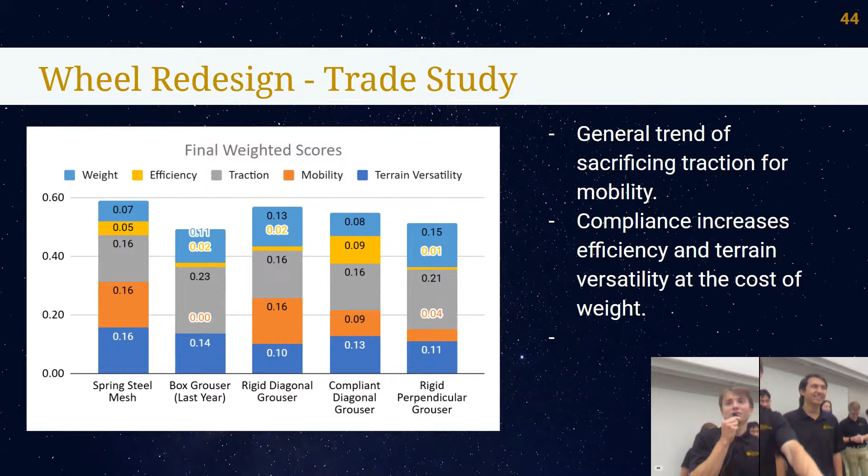No, it was definitely pretty bad. There were some not properly made conclusions after PDR that should have been shot down. Still, step forward, we tried it. It was a very, very small step forward and a few steps back in other areas, but I'm very proud of the work you did. That was very good.

So looking at the rigid diagonal grouser, is that sort of your estimation of the cream of the crop in terms of sourcing ideas from other teams? Yeah, so that was from Utah. We also looked at a bunch of the other teams who also had really good turning, and one of the common factors we saw was angled grousers. If you orient the wheel where it almost forms like a diamond with the angle of each grouser, it creates a really good point-turning radius compared to ours.

And then my final question is, it seems like there's a lot of question marks in all of this wheel design process. Is there any plan to set up some form of testing? We don't have a pit at the moment.

Give it 3 weeks. What, you're testing right today? Calm down, I can speak on that.

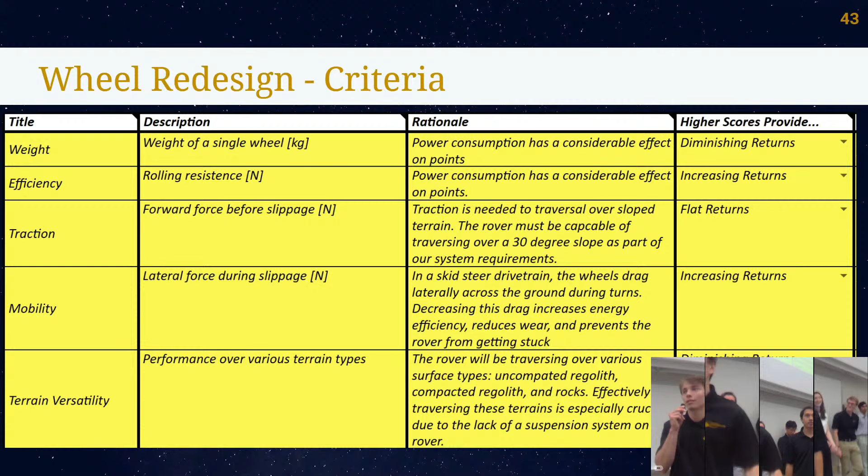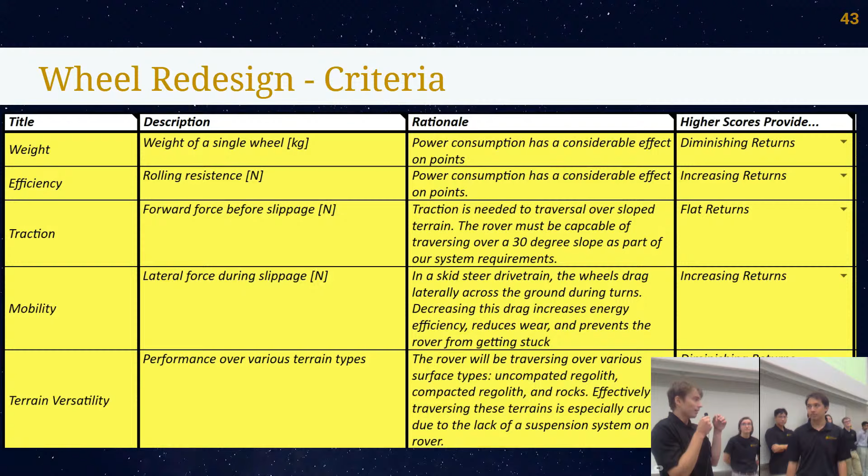So in regards to testing, we definitely want to measure each one of these criteria. Unfortunately, it may be in a sand pit instead of the regular pit. Our plan on measuring each of them is kind of in the description a bit. For mobility, we're planning on making a scale model as large as we can of each, and then getting a scale and pulling it to see how much force we get laterally when it's slipping. Traction is pulling it the other direction without it slipping, and all that. They'll probably be 3D printed. And then I'm not entirely sure how we're going to mimic the compliance wheels.

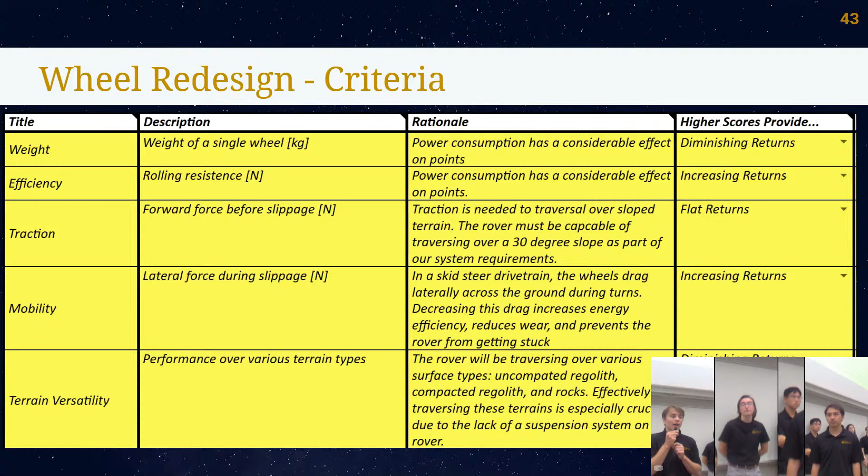It could be a long-term project. I mean, compliance, yes, so you have to. I feel like we keep on saying that though, like every year it's always a next year thing, I mean, at some point we've got to actually commit.

I'd be seriously concerned about it deforming permanently when the robot sits idle, it just gets flat on the bottom, that's my main concern. I know NASA had on their lunar rover wheels, they had a bar like inside the wheel to prevent it from permanently deforming, and we would probably have that anyway for the angle grouser attachment. It's up to the chief engineer if you want to take that risk.

Here's the mesh, two mesh, one was rigid, one was like compliant. So if the compliant wheel went over a rock that was really big, it would hit that rigid area, and it would just go on top.

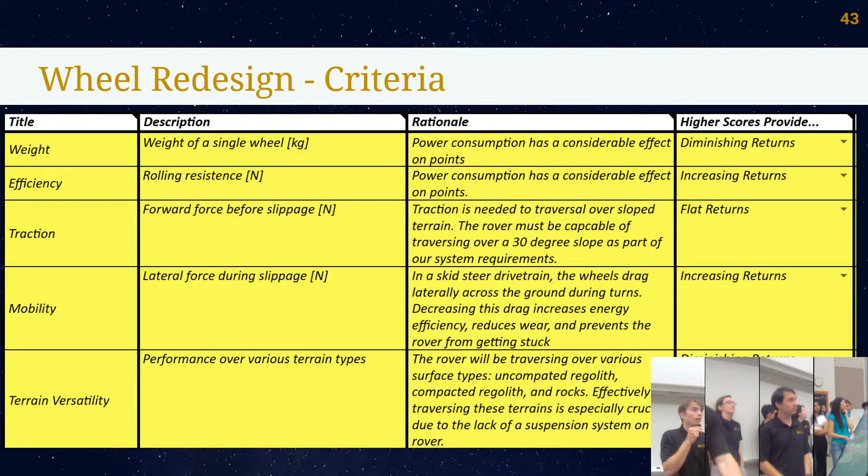I also want to note that we could maybe look into both, from SDR to PDR, and prototype both designs to see the feasibility. The rigid diagonal grouser we know we can make really easily. But if we commit a lot of time to these compliant wheels, the final product of the rigid diagonal probably won't be as well optimized. You might be looking at a little bit poorer efficiency and mobility because we won't have time to do other tests. But in my opinion, I think that's worth it for sure.

If we do two robots, I don't think it would be worth it. That's the other thing I didn't bring up - with two robots, why would you need a compliant wheel on your excavation robot? You'd probably be looking at lowering weight instead since it's not going over that versatile terrain, and it looks like we're having tracks on the mini bot. So the compliant wheels would definitely be maybe over-engineering that a bit.

Got it. You had a question? I was going to also say compliant wheels will take up a lot of time, both on the design and on the manufacturing side.

And looking at that diagram, I understand it's not a complete diagram, but there are several things that would be very hard to make in the compliant diagonal grouser. The rigid diagonal, we know we can make it, we can spend time optimizing it as opposed to spending time figuring out how do we even do this.

Also, a lot of your ideas are much more on the complex manufacturing side. So be very careful with making sure that your ideas don't spend too much time on making an idea work in a suboptimal way just because otherwise it's physically impossible to make it - versus on the rigid grouser, where in theory it's way worse, but we can make all the parts so it ends up being a better version of itself and ends up being better.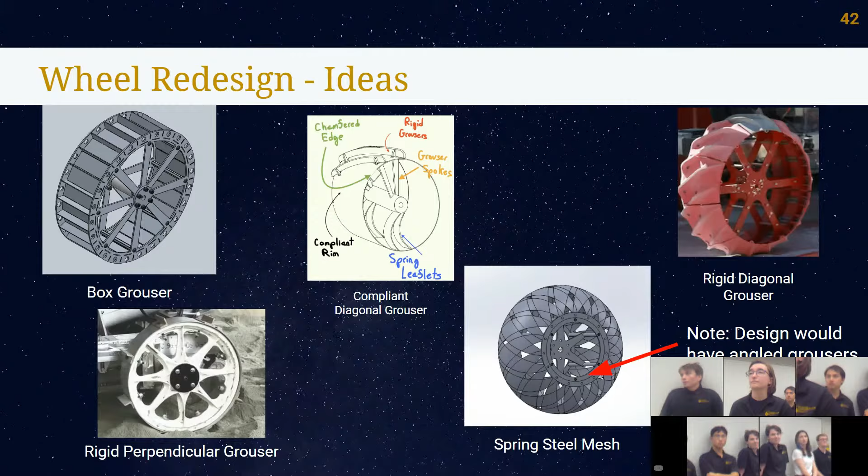For the dust covers, has there been any consideration of trying to use a standard or semi-standard rubber O-ring instead of the TPU printed one? That could be bought. Right, O-rings can be bought, and PLA is cheaper and very easy to print. So there are different options for what material can be used to make them. Whether we buy it or make it is a later decision, probably a PDR one.

Hans - so for the frame, I'm assuming you're going with box tube again? Yes. Okay, then with the gearboxes, you also mentioned you're going to go with the box tube gearboxes. Can you provide some of the reasoning behind that? Why we're still going with those?

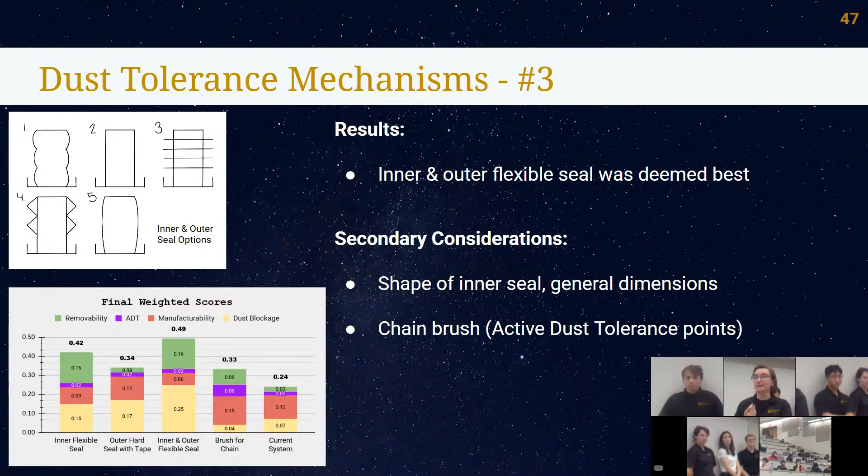They worked very well, besides the one that got dimpled in when it was very aggressively put together due to issues with how they were assembled, which is why we are going to work on the design to make it easier to assemble, and then 3D print a test run for assembly. But structurally, they worked very well, so we're trying to continue with that, but improve the ease of assembly.

Once we assembled them, because we went with chain, once they were assembled we did not have to take them apart during competition. Whereas if we did shaft, if we had an issue with the shaft, we would have to take all of that apart and take those off the robot as well.

One more thing I was thinking about. You said you're doing one gearbox. I know last year we wanted 2-to-1 gearboxes, but we didn't because they exploded repeatedly due to factors outside our control. Have you considered using a 2-to-1 gearbox inside drivetrains so we can get the same torque output out of a 50-to-1 gearbox? That wasn't thought of, but it can be.

That's not a huge design change with the gearbox, so that can be discussed further. Because I looked into that last year, and it wasn't possible due to having box tube gearboxes. It's just that you're very limited by the size—you don't have very much space in there.

Considering the metric shafts we went with, if we wanted an affordable gear—even the gears we bought were like $50—if you want a reasonably priced gear that's the correct tubing for the actual shaft and can fit in there, it either didn't exist or we had to make it ourselves. Maybe we can't get 2-to-1, maybe something like 1.25 or 1.5. I don't know the gear sizing, but any amount would help because more torque is better. That can be looked into.

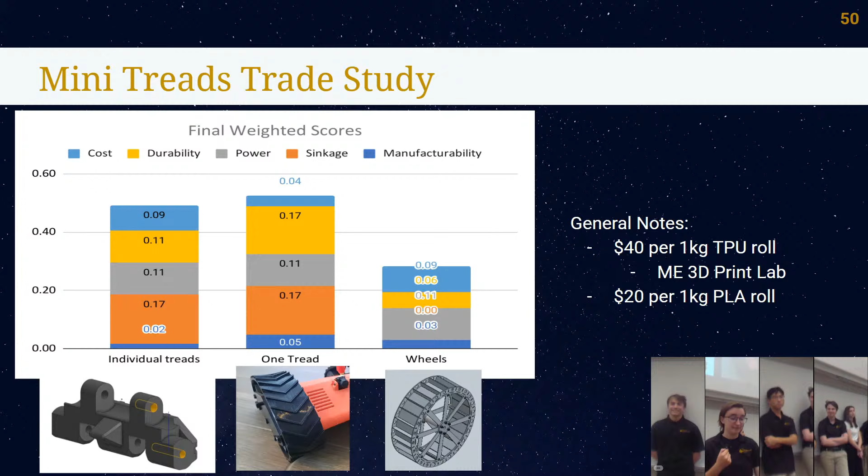How much weight it supports depends heavily on what material it's made out of. This was done on the lighter end of the scale, so minimum we want it to be able to support 60 kilograms. More in the sense that on the upper end, it would be planning to support more than 60 kilograms of regolith volume. Yes, and we can adjust for that. This is a very rough estimate for the Minibot.

On that note, are you concerned, since you mentioned 3D printing and durability, that a 3D printed part might not be able to handle having 60 to 100 kilos put on top of it? That's why material matters—for how much the robot weighs, how much the Minibot weighs, and how much weight it can carry. Those are very relevant parameters, because the more the Minibot needs to carry, the more durable and heavy the materials it needs to be made out of, which means the more it'll weigh.

I get the feeling that there needs to be a meeting between the subsystems talking about the mini bot, because to me it seems like there hasn't been that much communication between the drivetrain side and the software side and the excavation side.

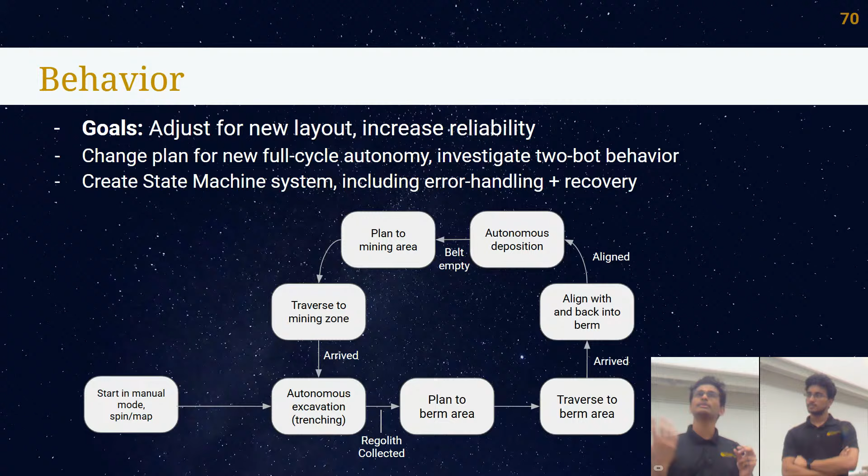This makes it really easy to insert a new error into there and say, okay, if we're excavating and we get a stall message, we can change our state to stalled and then carry out the actions associated with that, and re-enter our behavior flow really easily. So it makes things a lot easier for error handling and recovery.

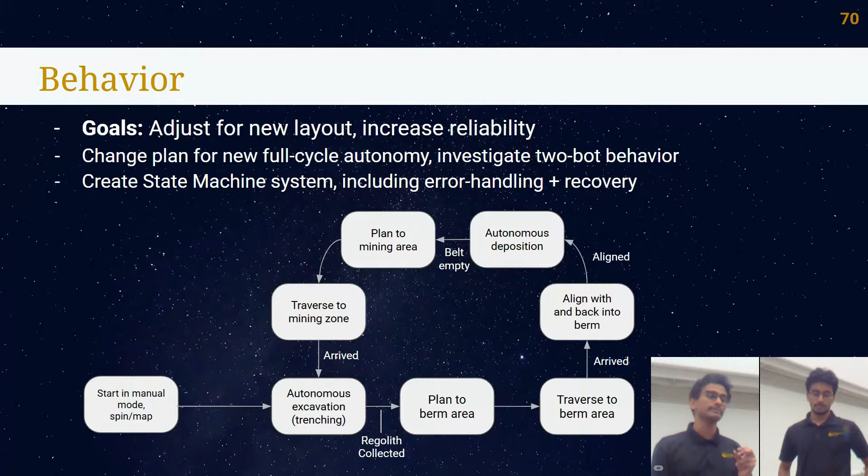Another thing we're looking at this year is having a separate compute box, separate from the P&H box. This would be a second box that would only have software components. It would operate off of a separate battery from the main robot battery, which is allowed by the rules, having a smaller battery that would only power the laptop computer.

It would not go through the power meter or e-stop, which will help us significantly when reducing power consumption. And it makes sure that if we hit the e-stop, we can still communicate with the robot after that. This also allows for better organization within the P&H box and more flexibility for us in the compute box.

P&H has a lot of components they have to decide on pretty early, and they have a lot of wires in their system, which means they need a lot more organization. Whereas we have a lot of different options we can take, and depending on how things perform later in the semester when we actually get to testing the robot, we may need to switch things out pretty often. So we need more flexibility in what we can do.

So the responsibility for design and layout will be on software, and we'll work with P&H for the connection points and any wires that need to communicate across. This is a small, basic layout of what it might look like, based on one of the designs. On the right is a sketch by Victor of P&H, a simple idea of how it could work, depending on mechanical teams and how that design ends up being done.

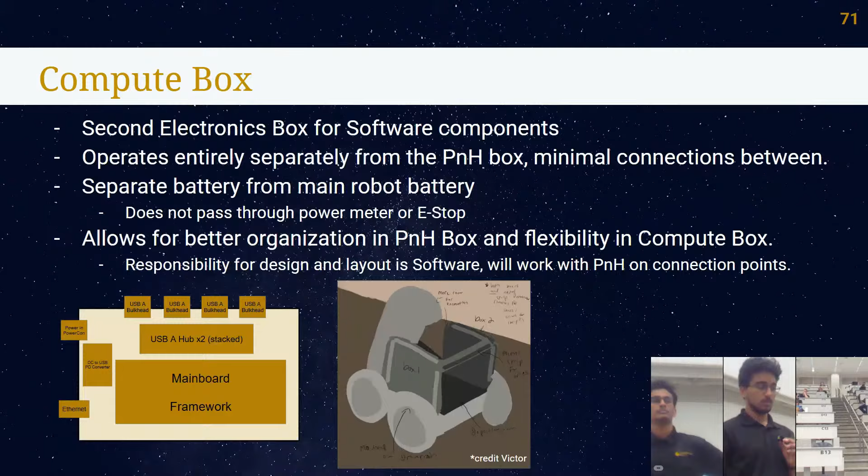In regards to the LiDAR, those typically, the way I understand they work, have a rotating body that's actually shooting out the lasers to generate their point cloud. Are you concerned about dust obscuring those? Because I would imagine those require a higher degree of precision than our depth cameras would. And are those mechanisms entirely sealed in a container to prevent dust from getting into them?

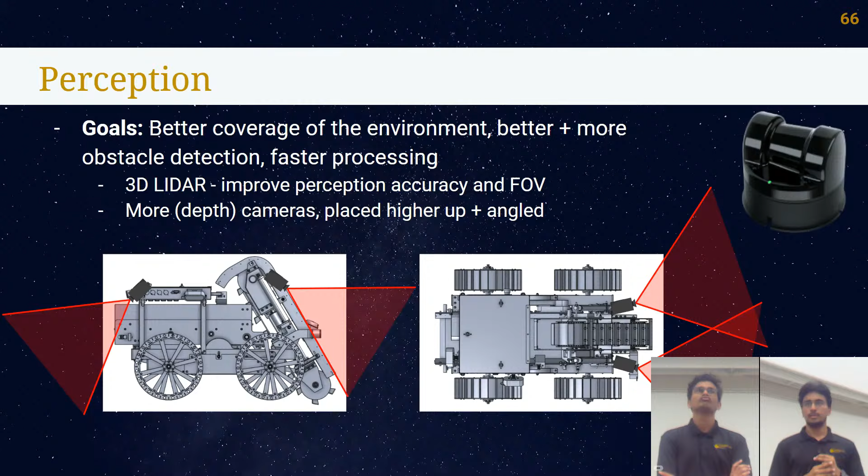I think that's it, so we'll turn it over to P&H.

We intend to have 3 voltages. We have 48 volts, associated with the motor. We have 24 volts, associated with the linear actuators, Sabertooth, and associated parts. And we have 12 volts associated with the Jetson. If we do use another battery, that'll be another battery on its own. But if we cannot, for whatever reason, we can just use a step-down converter to 12 volts.

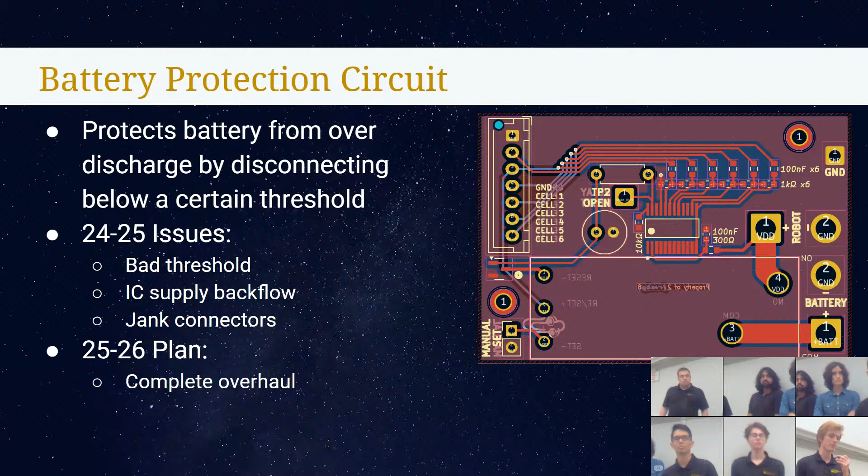So I think next slide, Teensy.

Like I said, a lot of it's going to be very similar, since it's really just handling everything else. So we're kind of waiting to see what everyone else needs and wants to be able to run, and what software needs to be able to see. As far as the 2-bot, mini-bot thing, the only main difference between the 2 boards will be the amount of power we're pulling out from the motors, depending on 48 versus 24 volt. Yeah, I think that's really everything. It's not a huge amount of overall happening for a Teensy.

Current sense. All right, current sense. So there will be current sense boards that measure current and send that info to the Teensy board. Different from last year. If you look at last year's schematic, you'll see there's one schematic, one board. There were multiple of them, but they're all the same schematic. This year we'll have 2 different designs at least, one for measuring current going to the linear actuators and one for measuring all of the current coming from the battery. We'll need 2 different schematics just based on the amount of power.

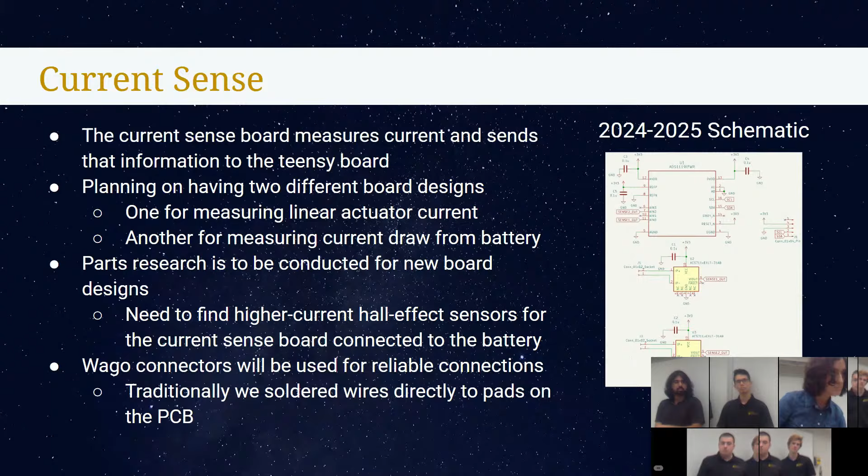So there's quite a bit we're doing in box design, especially because we're having multiple robots and potentially multiple boxes for each robot. First being breakers. Breakers are included for many reasons, the main one being safety. They make sure everything is electrically separated, prevent current backflow, and make sure nothing propagates throughout the rest of the box if something goes wrong.

At the moment, we are still waiting to hear from other sub-teams about what components they'd like to use, so we know how to size our breakers properly. But we are using last year's data to see what should be implemented in our breakers, to see what we can work with even if we don't know exactly what they want, and to get a better read on what it might look like in competition.

Another big part this year is part research. The main robot is actually going to be pretty similar to last year, so there's not that much part research to be done, except for the fact that if it is 2 boxes, we will need extra connectors. We'll need to figure out how to connect the 2 boxes and what the logistics of that look like. That will require quite a bit of work.

But the main thing is the mini bot. Most of what we intend to have in the mini bot, I believe, can run on 12 volts. So we're seeing if maybe we could run it off a 12 volt battery. And if maybe just the motors are 24 volts, we can have something step up the voltage there. If that's the case, that's great. Or we can also run it off a 24 volt battery and step down to 12 volts too. It really can go either way, but it would be nice if we could just run it off a 12 volt battery.

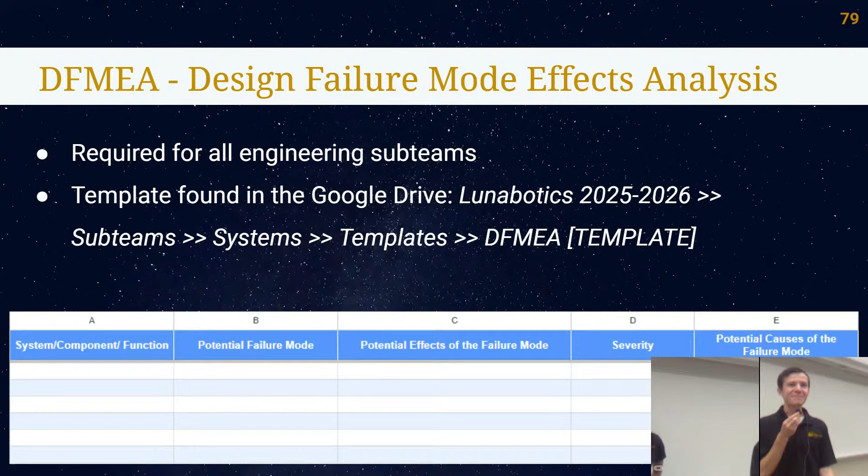Let's go into a little bit more detail about one of the things all the engineering subteams have to have done for PDR, which is the DFMEAs, the Design Failure Mode Effects Analysis. This is the safety document that all the subteams should be filling out. Although it is due by PDR and you're going to be presenting it there, we hope you can get it done as soon as possible, because it is a tool for you guys to help make sure you are being safe, although we are still in the design phase.

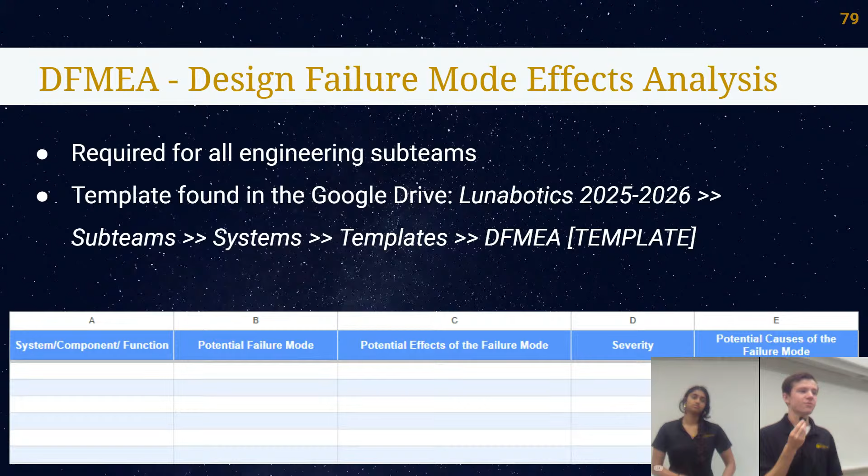You can find it in the systems folder within the template subfolder in the drive. You can pretty much reuse a lot of the stuff you have from previous years, but update it and add anything new that you think of. Within the template, there are lots of instructions and information on how to fill out the table, so hopefully you won't get lost filling it out. Most of you guys have seen these before, but if you do have any questions, please feel free to reach out to Systems, Raiden, or I, and we can help solve any issues you may have.